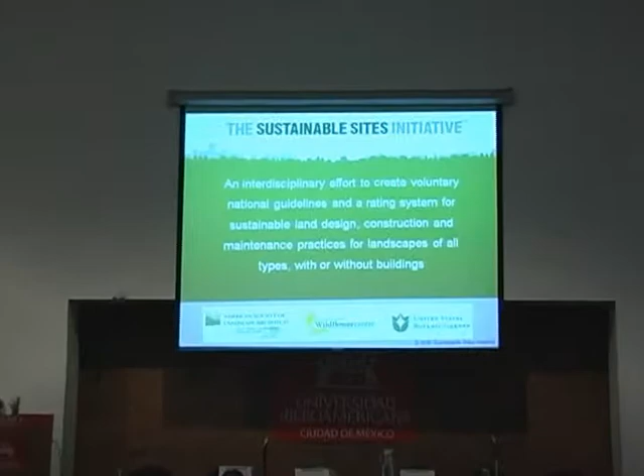There's another new program you may not have heard of because it's still in the formation stages. It's a program of, right now, the U.S. Green Building Council with the landscape architects of the United States, as well as the botanical gardens in the United States. So those entities, along with the National Wildflower Center, have decided to address site issues that aren't covered in LEED, because there are many concepts in development that are missing in LEED, and so they're trying to fill in some of those concepts with site development. Say you have a large tract of land that you are trying to do restorative design on.

There's much in LEED that's missing that this new initiative would help with. They're looking for pilot projects right now. So if you have a project that has more of a park-like concept, or if you're developing a park, this might be a system to look at.

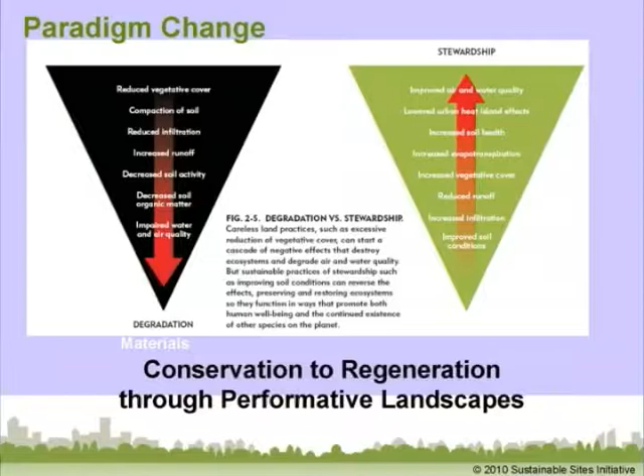They're trying to do a regenerative design. I know some of you have been in the diploma course long enough to know what regenerative design is. That was one of the first lectures you had, about how to restore a site or make it more vital than the typical way we build, which continually degrades the natural environment because of our imposing ourselves on that property.

So they have a better assessment of the site, first of all, to do a full environmental impact. What is the geology of the site? What are the birds on the site? What are the plants on the site? What is the annual rainfall? So it's more of an assessment of the site than one would typically do in just building a building.

So you're trying to get an idea of what is on the property, first of all, doing a more thorough examination of water and what flooding might be, and what natural rainfall there might be, and what water use is going to be needed within the project.

It's been a year since I've been here to Santa Fe, and I think there might be about 10 new buildings within the last year. I was asking somebody, well, what about the water? I thought that Mexico City had an issue with water. And they said, oh yes, these buildings are building these big tanks, and they have to have a truck come fill up the tank every night. So there's been a little bit of a disconnect about how much water is being used in a building and how much water is available by nature here.

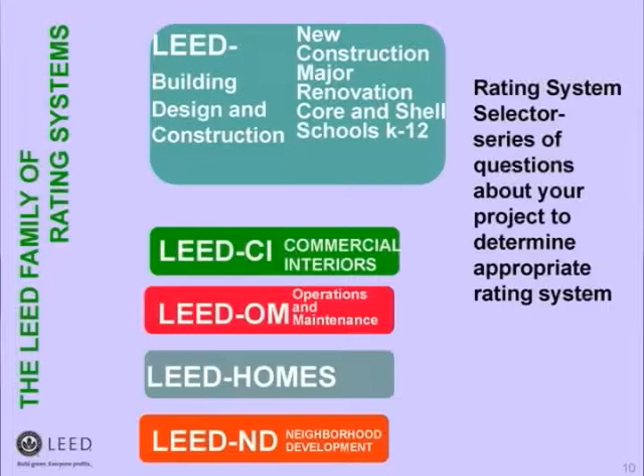The primary rating system was for new construction of office buildings, but we're trying to expand that to a number of different kinds of buildings, and to apply these to schools and distribution centers and factories and all kinds of other types of buildings—not all of them. Higher education is another effort; we're trying to do some translation of the office building concept into these other building types.

We also hope that people would continue to renovate old buildings or revitalize maybe just a couple of floors within the building. So we have a commercial interiors design effort with its own rating system.

Retail has its own rating system. Operations and maintenance—we're hoping that people will want to maintain their buildings in a more sustainable manner, which means a lot of analysis of what's working and what might not be working, and to make it work better. So we have this operation and maintenance system.

We now have a single-family homes system. Multi-family homes can apply under the single-family homes system if it's up to four stories. If it's more stories than four, then it would need to go under the new construction concept and under a multi-family system.

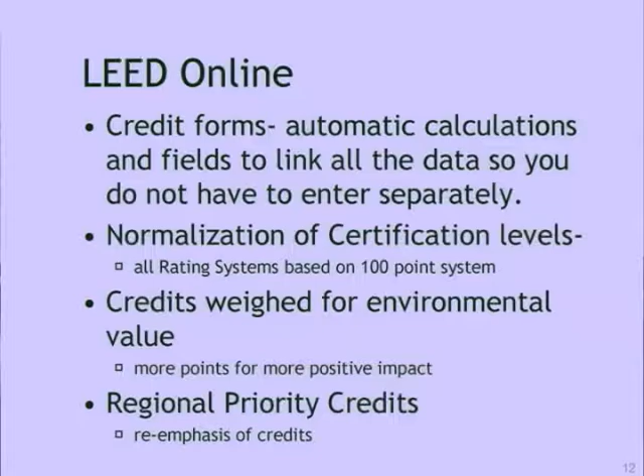All of LEED now works with LEED Online, so to get your building certified and to learn more about LEED, there is a website, the gbci.org website, that has the LEED rating system explanations on there.

To be a practitioner, you really have to purchase—I think somebody has a reference guide here—you really need to have the reference guide to get the full explanation. Actually, it's frankly not a full explanation; some of it still leaves a little bit to the imagination, and you have to go to other sources to find out what they really mean. But it's a good stab at trying to explain each one of the concepts and what we're trying to achieve, and what you would need to document to prove that you've achieved each one of these things.

So each credit within LEED has its own form online that you have to fill out, and that form guides you to the other documentation you might need. So you might need to upload a floor plan or a site plan to demonstrate that you've achieved the credit.

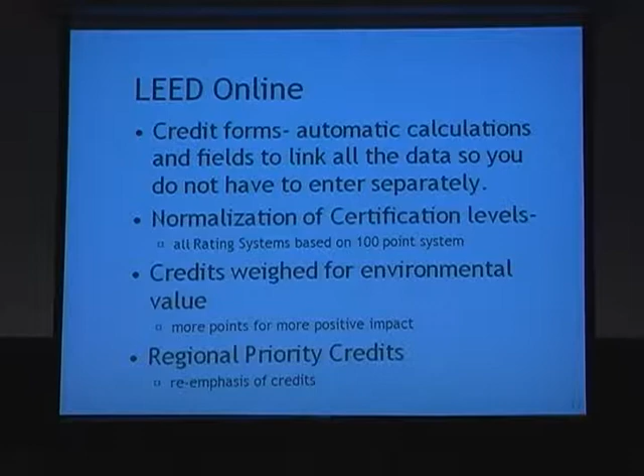We went through a reevaluation system, and with LEED it will always be upgraded. It will always be a dynamic system. We are trying to improve it continually, and we want feedback from people working in LEED to make it better. Each time we make it better, there are little incremental steps towards improvement.

The last time we reweighed the different credits for environmental contribution, so for instance, now for being on a metro or mass transportation line, you get 6 points. It used to be just 1, but we feel that's much more important to the environment now, so we gave it more points. The other new thing within this new LEED system is regional credits.

Regional credits are something that you as a chapter would identify within the LEED rating system as important to your community. So things like waste management, garbage, might be important, or I don't know what the main issues are here. Water might be important in Mexico City, as it is where I'm from in Texas. I'm from someplace that hasn't had rain since September, so water is very much on my mind. There are going to be these regional credits that as a chapter you identify as important in your community, and you get extra points for achieving those.

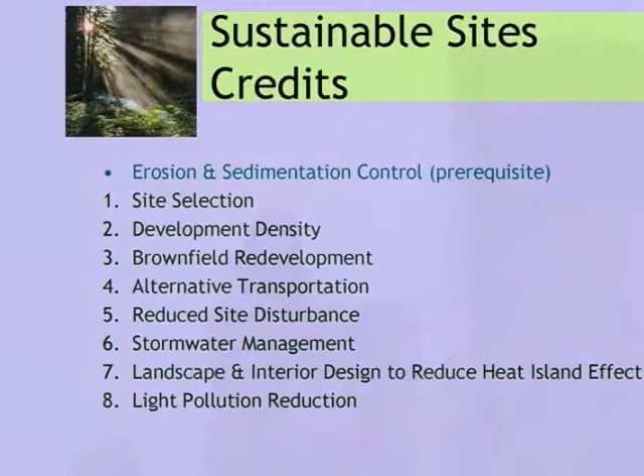With sustainable sites, it's a requirement that you control the pollution from your building during construction, so that while building you don't pollute the streams or the air. Where I'm from, we don't have much soil, we have a lot of rock, and they use big rock saws to cut into the stone, which creates a tremendous amount of dust. Everything within miles of a construction site turns white from all the dust.

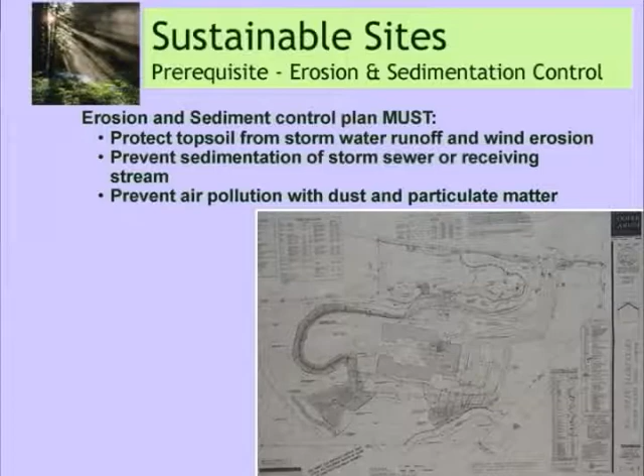We now have laws about containing that dust and keeping it on your own site during construction. There are also other laws about runoff, so whenever it rains, you can't have construction pollution or silt run into the stream. That's a requirement for all LEED projects everywhere. You need to identify where the streams are in your area and make sure you're containing any water from running into a stream, and prevent dust and particulate matter from becoming airborne. Here are some examples of erosion control and pollution prevention, some of which you might not recognize.

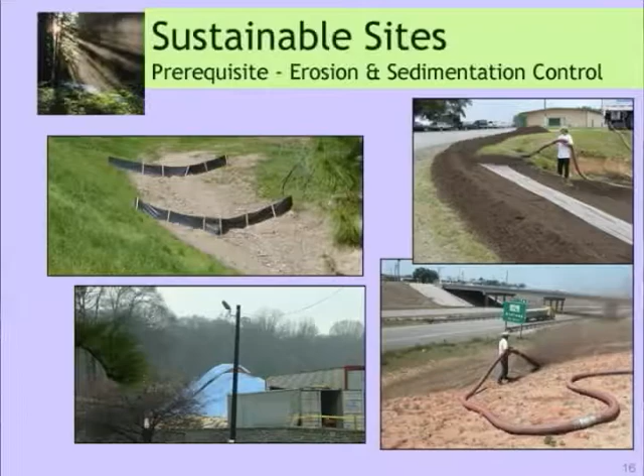And then you might already be familiar with siltation fences and seeding. They're seeding the site so that grass grows really fast before it has a chance to cause erosion.

This is the only point where you don't do anything and you get the point. This is one where you're trying to avoid a lot of situations. So you're trying to not build a building on a former farm. You're trying to avoid being in a floodplain.

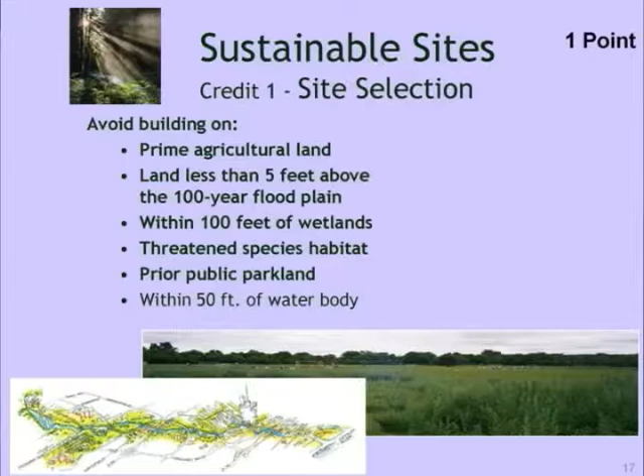I know that's a difficult thing for Mexico City. I mean, isn't your whole city a floodplain?

I think it is. Anyway, you're trying to avoid wetlands because wetlands are a very crucial environmental natural balance system. It helps with floods, it helps with habitat, all kinds of things. So we consider wetlands very precious. When I was growing up, we used to call them swamps, but we don't use that term anymore. We call them wetlands, and we value them now.

We used to, in the United States, have this organization called the Army Corps of Engineers, and I think they felt it was their mission to fill in every wetland possible. So they were really trying to fill in dirt everywhere there was any kind of wet area.

We want to avoid any sort of endangered species habitat, including birds, plants, and insects. And we also want to avoid any kind of public park land. We don't want to redevelop on a public park. And we don't want to develop within 50 feet of a water body.

Can anyone tell me why that is? Why don't we want to build really close to the ocean, let's say? Well, there's flooding, there's hurricanes, there's natural disasters that happen when you're really close to water bodies. It's just kind of not very smart to build very close to those things because you know your building's going to be harmed in the future, or your building might harm the river or stream or body of water that it's next to.

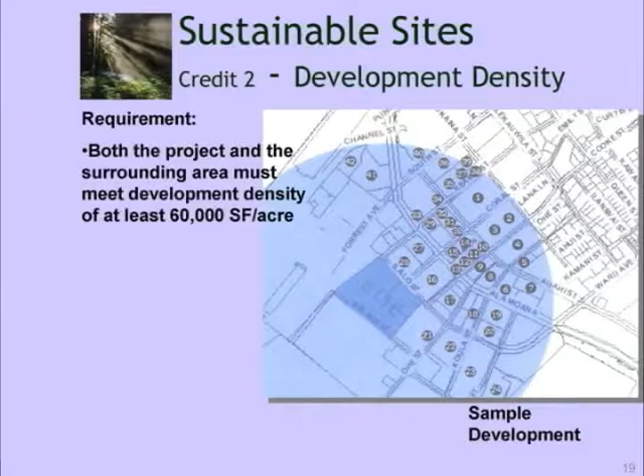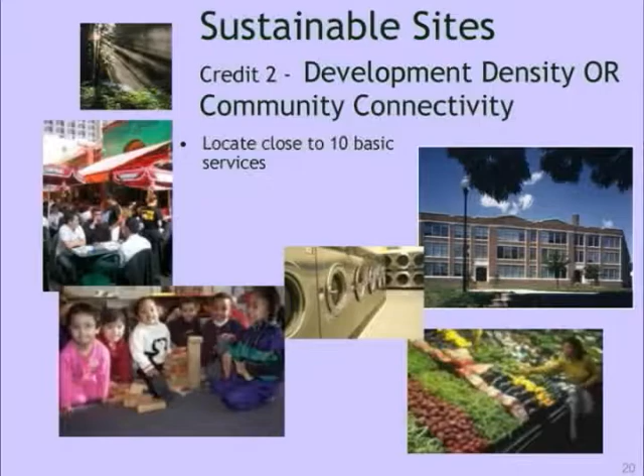So there's two different strategies for this credit. Either redevelop in some place where there is already a dense urban core, and to achieve this credit you have to identify what the density is around your site. Or, because that was difficult and challenging for some of the smaller towns to get that same level of density, and we still wanted small towns to stay that way, stay as a small town and not keep trying to make themselves urban...

We said, well, we can identify some crucial community connectivity areas like schools, grocery stores, restaurants, places where people do their normal business. So if those are within walking distance of your building, then you can get this LEED credit.

We also wanted to give credit to develop a brownfield site. Can anyone give me an example of what that is?

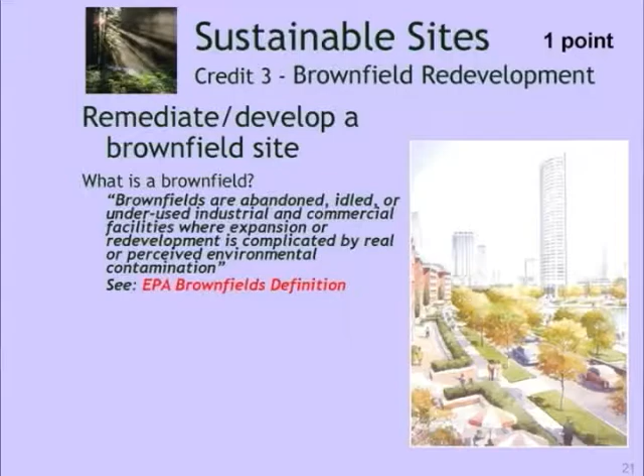Actually, I just learned this university here is on a brownfield site, which was a surprise to me. I didn't know this used to be a landfill, a garbage dump, and they built the university on top of that. That's an example of a brownfield. A factory is another example - if it has polluted someplace and there's something to clean up, and you make it clean enough for a building and for humans to be there safely, then you get credit with LEED to make a site more revitalized, remediating the brownfield.

There are 4 different credits that have to do with alternative transportation - alternative to the car, the single occupancy vehicle. In the United States, I think we only spend 55 cents per person on pedestrian infrastructure. I think here in Santa Fe you spend less than that - I did try to walk around here once, and it's really hard to walk around in this town. We spend $72 per person for roads. There's a disconnect here in the United States, and I think you have a similar one here in Mexico City, in that we're not putting enough emphasis into letting people walk or bike around conveniently.

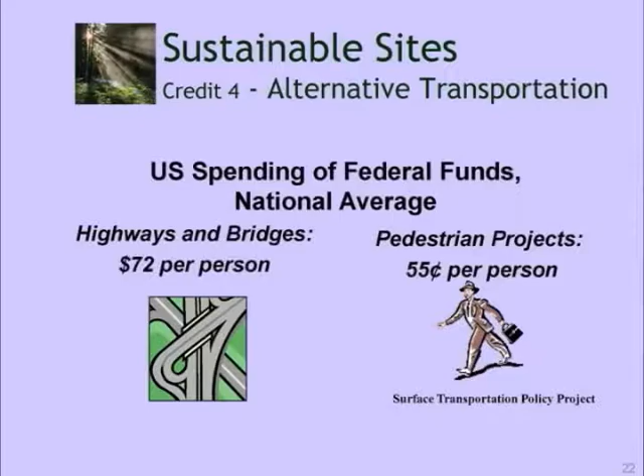To have safe pedestrian access to places - where I'm from in Texas, it's really hot, and everyone keeps saying no one in their right mind would walk or bike. But we used to have a building downtown with no provision for bike racks, no shower or anything like that, and nobody rode their bike. Our same group of people moved into a building where there were bike racks and showers, and about 25% of the people started riding their bikes to work. This is the same work group who for 10 years never rode a bike, but as soon as we made it accommodating for alternative transportation, people tried to do it.

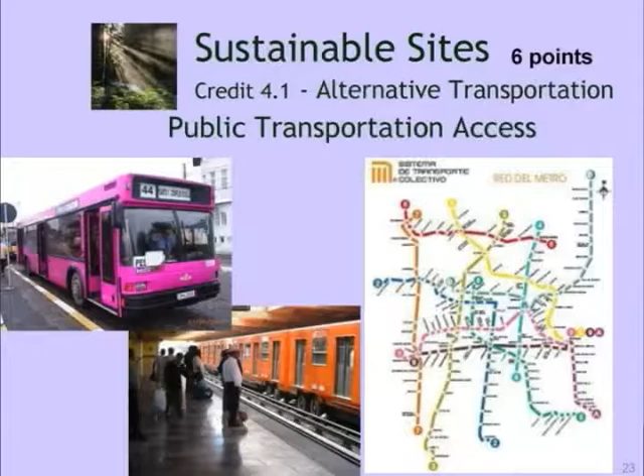This is the credit where I was saying that you have a lot of points for. So if you develop your new building along a route that's already on your metro or on a major bus route, so you have more than just one bus a day - when you have many buses a day coming by your building or within a quick walking distance, you get 6 points for this. That's a pretty good deal. This is not something that's going to cost your project in construction cost - it's just a natural attribute a wise owner would have looked into for redevelopment of a building.

You know, I'm not good at converting. It's half a mile - what's half a mile? So it's not real close, but, you know, a comfortable walk.

Another form of alternative transportation is bicycle riding. I understand you've been trying to build more bike lanes within Mexico City, some more successful than others. For this credit, you would need to also have a shower in your place of work, or access within an easy distance for someone to take a shower, because a lot of us get really sweaty when we ride bikes, no matter what time of year it is - so you can be fresh for work. The other requirement is safe storage for bikes so they don't get stolen, and the second requirement is to have showers. LEED doesn't care about male and female - it can be a unisex shower. It just has to be one shower per number of people. It's pretty simple to do.

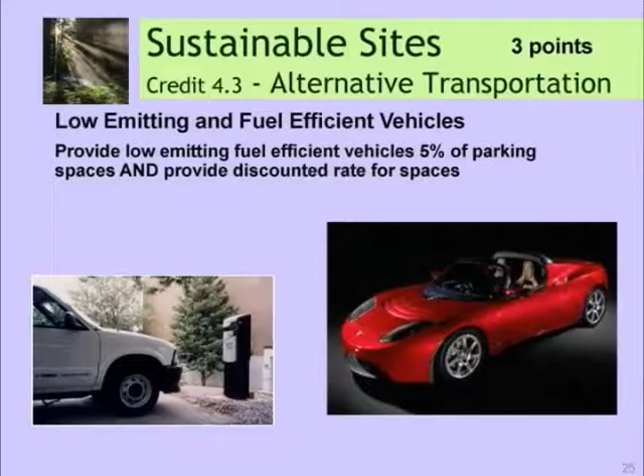I think when we were starting LEED, we were expecting all the cars by now to be run on electricity or something like that - there's a strong favor for having plug-in cars for this next credit. We realized after about the first year that wasn't going to happen anytime soon, so we changed this credit to be low emitting and fuel efficient automobiles. This is preferred parking, or even providing fuel efficient automobiles for your project. So if you were to provide parking spaces at all, the requirement to get this point is that you put those preferred parking spaces really close to the door so people can feel good about driving to work in their low emitting fuel efficient car.

I got to drive one of those new Volts - have you all heard of that? The Chevrolet Volt the other day, and I was really surprised. I was expecting it to not have any pickup. I understand this Tesla has a lot of pickup, but I don't think they're very available yet. This Volt is available, and I was surprised at how safe it felt and how much power it had and the range it has.

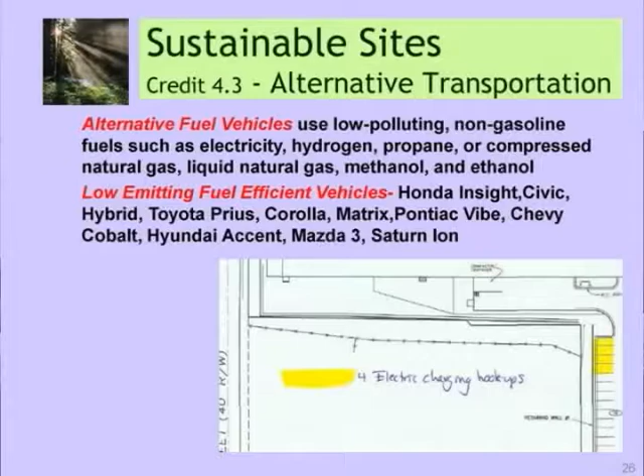So you will have to demonstrate that you have preferred parking places for these vehicles, or that you provide the vehicles for your staff, one or the other.

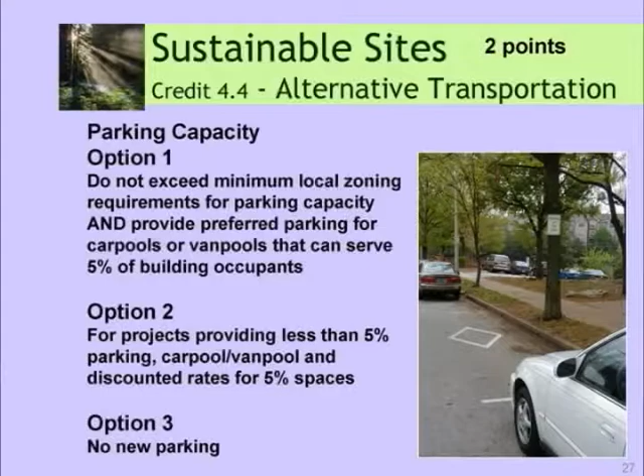Another alternative transportation strategy is to try to make it very costly for your employees or people in your business to drive their car. So it says to either have no new parking for your building, or to not exceed any of your local building codes. Do you even have a building code for a parking requirement? You do, so you do have to provide some parking if you have a building. This means don't exceed that, because a lot of businesses will say, oh, we need to prepare for Christmas time when we're going to have this huge party and everybody wants to bring their own car here, so they build the biggest parking lot possible. This is build the smallest parking lot possible, and for you to function within your business and to meet the building code.

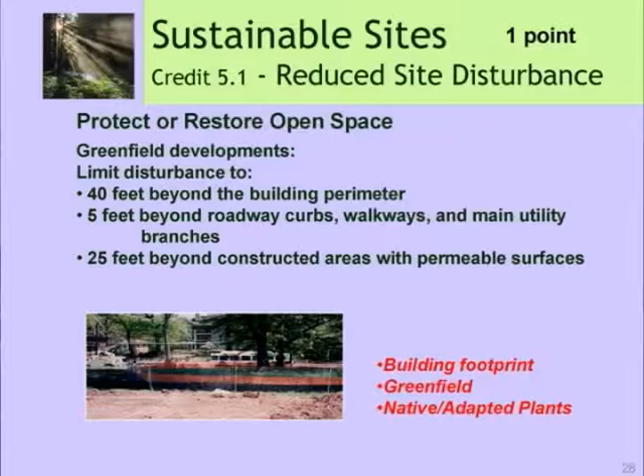Another good thing to do is to reduce the disturbance during construction. A lot of times, at least in the United States, and I think it's pretty typical all over the world, you get a big bulldozer and just bulldoze the heck out of the site, make it really flat, so it's easy to build a building on. That really destroys all of the natural habitat. It destroys the visual qualities of the site. It destroys the ability for the site to help remediate stormwater, because often plants can clean the water and slow water down during a storm situation.

And it also prevents the trees from cooling the site, so it has multiple benefits to keep what plants are on your site there. And if there aren't any plants, then to bring them to the site. So right now, for this credit, we're trying to protect what plants are there and to not do any more harm to the site than you need to build your building.

One of my first projects that attempted this, long before LEED, we tried to make sure that this site, which was going to be for a nature center, was protected, since the nature center wanted to protect the nature, right? So they didn't want bulldozers everywhere ruining it. So what we did was we put signs on the trees with the value of a replacement cost for each tree. We had these trees tagged with like $23,000 or $30,000, because that's what it would cost to buy that size tree and bring it to the site. We did the same thing for the other vegetation. And then all the workers on the site had to sign a contract saying if they damaged any of those tagged plants, they had to pay for it.

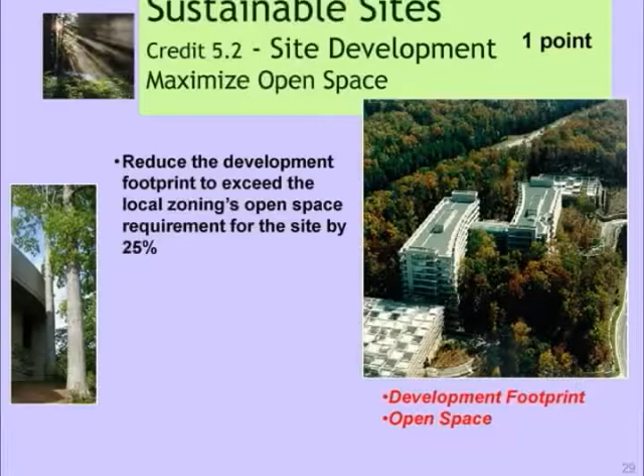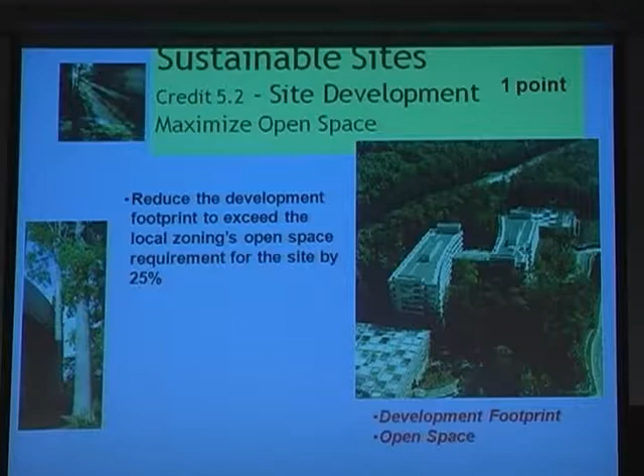For this maximize open space credit, we are trying to make sure that there is such a thing as habitat. In this particular case, we're trying to reduce the footprint. Texas might be the capital of this, where we want to build a one-story building that takes up acres and acres and acres instead of building up. I mean, we just seem to want to do that. So this is trying to get away from that concept, build a smaller footprint and build up.

This big building on the right is UPS's national headquarters. They decided they didn't want to harm any trees during construction. When they mapped out the footprint of the building, they dug up and relocated any trees that were in the way. They felt this was important for creating a pleasant work environment, wanting executives to look out into the woods and see these beautiful trees. They even use that as a recruiting tool. So preserving the trees was really important to them in this case.

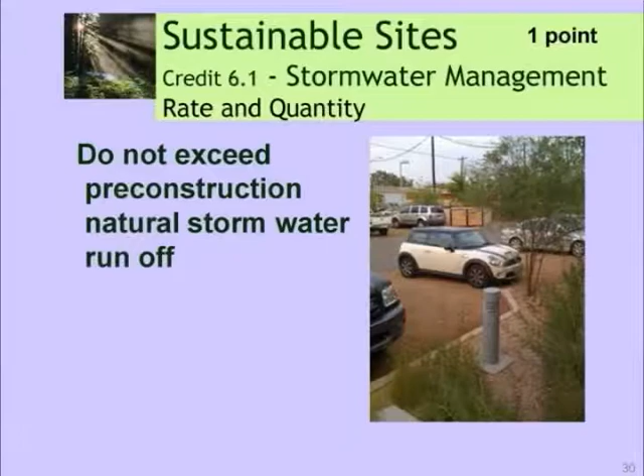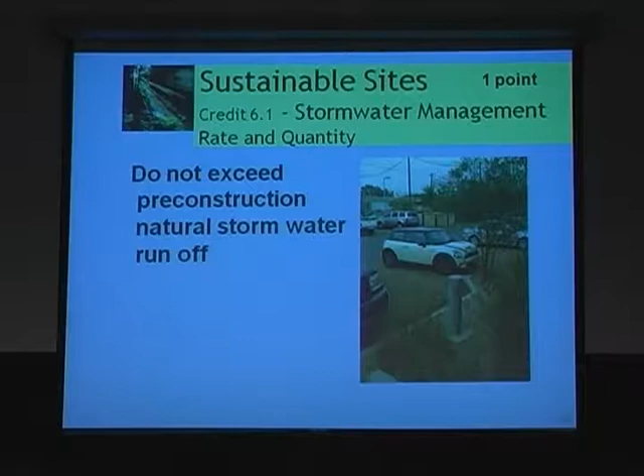I was working with the country of South Korea, which actually gets quite a lot of rainfall. I was helping them develop green building standards for a new building that was going to be their first ever green building in South Korea. It rained the entire time I was there. Coming from a place where rain is precious but also causes flooding when it all comes at once, I started asking what they were going to do about flooding.

I was looking at the parking lot during one of these rain events, and we had to walk through a lot of water just to cross it. They said, oh, it's not a problem here. I said, it's a problem for me to walk through this much water—surely when this building is finished, it's going to be a problem for these people too.

I understood that before construction, they actually raised the building up and added amenities to capture storm water, because a really bad storm hit the week after I left and the area flooded so badly that they thought, 'Sue might have been right about stormwater. We need to go back and do something about stormwater management for this project.' So they did, and it worked.

There are two different LEED credits regarding stormwater. Even if you think you don't have stormwater problems, you probably do. There's the amount of water falling on your site, and LEED wants you to survey the site before you build to find out how much water runs off—and once you build, you shouldn't let any more water than that initial amount run off.

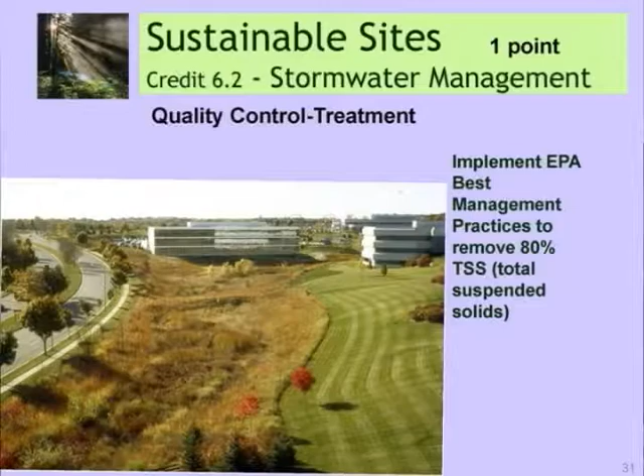The other thing to be mindful of during storms is that water from your parking lot—most people's parking lots have a lot of oil and hydrocarbons on them from cars—can run off your site easily and quickly into a stream.

This piece of property, I think in Detroit, Michigan, was being fined by the federal government for creating pollution problems, with a lot of runoff going into the stream. A landscape architect said, if you give me the budget you were planning to spend on mowing and landscape maintenance, I bet I can not only save you money on maintenance but also save you those pollution fines.

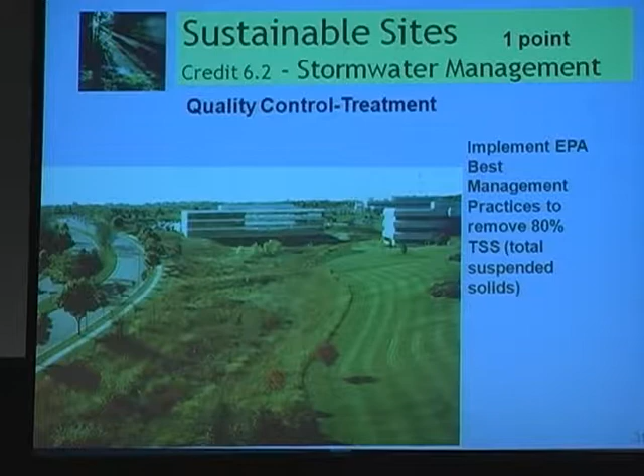So he went back in and vegetated this former ditch or culvert with native plants known to take up hydrocarbons. They take the pollution out of the water and clean it up before it goes further downstream. It's now a visual amenity as well, reducing maintenance since there's no more big mowing, and they're no longer paying fines for pollution.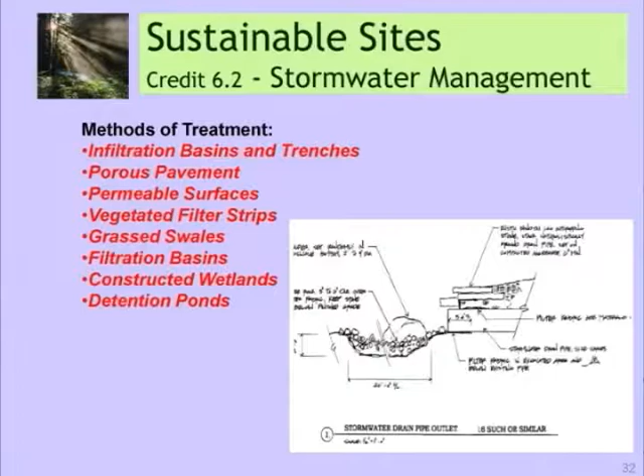There are other best management practices, like rain gardens. One of the best things is to also collect rainwater so that you don't have stormwater runoff—you're collecting it already to use within your building. There are a number of different ways to use nature to your benefit to prevent stormwater problems.

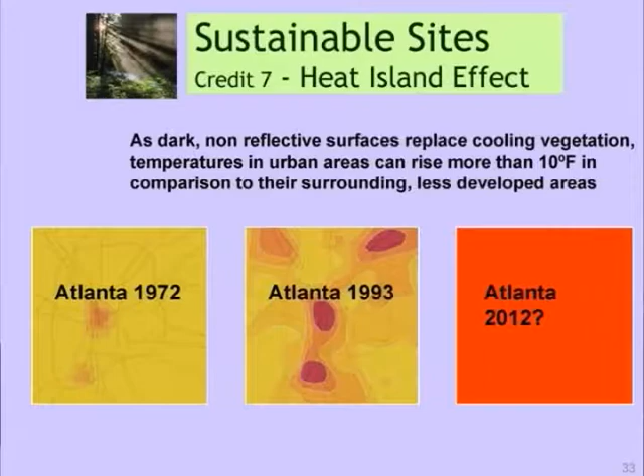We have this organization, called NASA in the United States, our aerospace engineering organization within the government. One thing I think is really neat is they do these weather studies with all these weather satellites they've put up in space. They've done studies with different cities about the heat island effect, measuring temperature all over the world since NASA started in the 1960s. I'm sure they have data for Mexico City and your temperatures here too.

So Atlanta decided to take advantage of these studies to help with their planning, and they started in 1972 getting NASA data on the heat island effect, or the temperatures of Atlanta. You can see in 1972 the downtown area, mostly paved with buildings, was pretty hot—about 10 degrees hotter than the rest of the area around it.

By 1993, other areas had started heating up too. The one in the south is a big airport, so they paved for the airport, which got really hot, and also built a lot of buildings around there. The area at the top is a new town—basically suburbia being built outside of downtown Atlanta. So the problem is it's all growing into one big heat island effect.

They used to have a whole lot of trees in Atlanta, and this is just an example of the urban forest disappearing because of urban building. So they're now doing a very strong reforestation effort downtown to try to cool the city down.

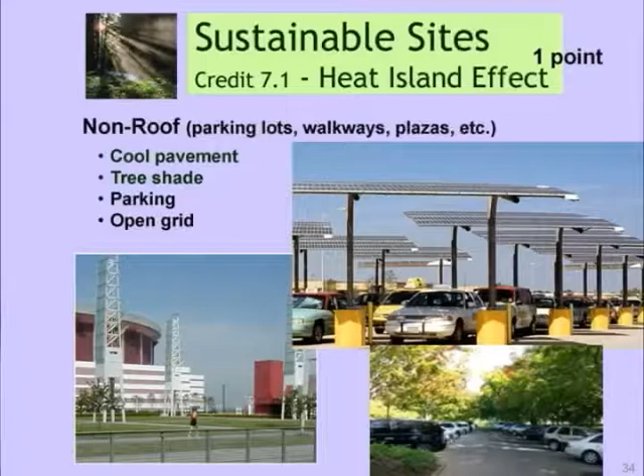The heat island effect is something that's affecting our global climate. It really is causing climate disruption, among other things, but just having much higher temperatures causes different weather patterns. Before, much of the world could be comfortable without mechanical heating and cooling, but we're having a lot more difficulty with that now because we're heating up our urban areas.

One of these is my project—the taxi waiting area outside the Austin airport. We covered it with photovoltaics to shade the taxi waiting area while people wait. I think we should have done it a little more uniformly for more coverage. I don't think we succeeded too well, but anyway, it's one way to generate electricity—all that electricity runs the parking lot lighting for the airport.

Cool pavement is another way to try to keep your site cool. This picture here on the left is the stadium in Houston—that green area is the parking lot, using a product called Grass Pave. It's enough support to drive a fire truck through, but it's grass most of the time when there's no event at the stadium, so it's much cooler. Houston's a hot place.

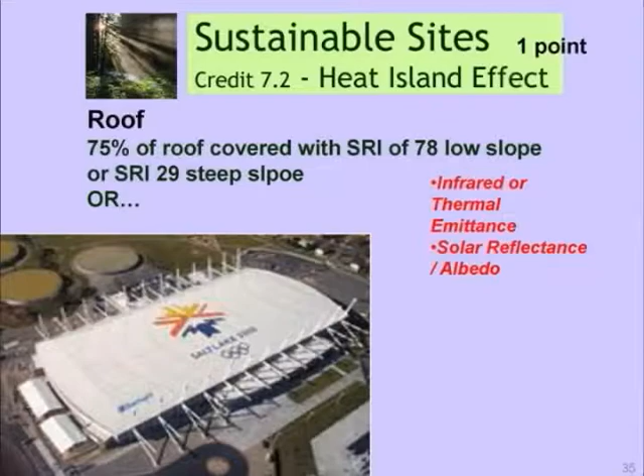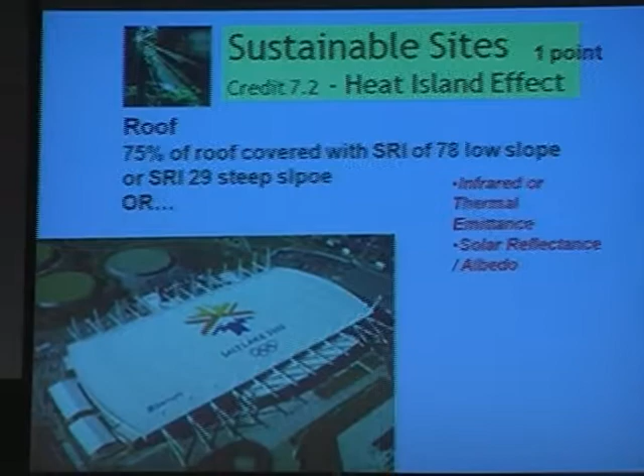It used to be very common to have black roofs, using tar to keep the roof waterproof. I'm pleased the cost of tar and oil is going up, making it look better and better to have a membrane roof and cooler roofs. A cool roof versus a black roof can make a 35-degree difference in your building. If you keep the sun off the building, even in a cold climate like Chicago, they found they were having to air condition much of the time because temperatures were rising and things were getting uncomfortable. A white roof made sense in Chicago, even with cold days, because they have a lot of heat days too. So a white membrane roof is something that will help you get LEED credit.

There's another concept called a green roof, where you vegetate the roof too. It might be a really good thing for here in Mexico City to have a vegetated roof. It might not be a good idea in other parts of your country where you don't get so much rain, because you might have to supplement irrigation on your roof. So just be mindful of what's appropriate for your rainfall, weather conditions, and situation in your place.

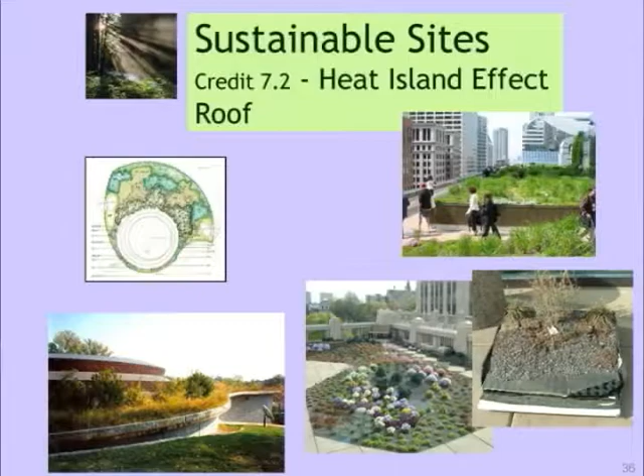These are some examples of vegetated roofs. They can be a real visual amenity. It's much nicer to look down on this from a building next door than to look on a black tar roof.

This is an area that's near and dear to my heart too: light pollution reduction. Living in Texas is somewhat similar to living in Mexico. We share a lot of similarities in migratory birds and migratory insects. We're on this big funnel that goes from Canada down to South America, and they go back and forth. They migrate by a bunch of different means, and the sun and the moon are some of the contributing factors to navigation.

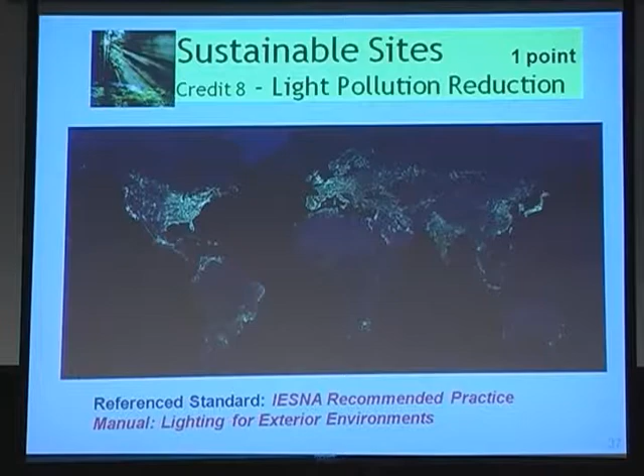When you have a lot of light at night, it confuses them. It's also an irritation to your next door neighbor to have really bright lights, so that's why we call it light pollution. As you can tell from this slide, you can actually see Mexico City. And who gets to benefit from all that light? The astronauts.

And somebody's paying for all that electricity to benefit the view for the astronauts. I just don't get it. So the point of this credit is to reduce light pollution and to also decrease the amount of electricity we're spending to go up into outer space. Try to put light where you need it for safety purposes, and don't have vanity lighting like Las Vegas or all these places that want to light up the sky, because we're really polluting, we're affecting so much of the environment that I don't think we understand yet.

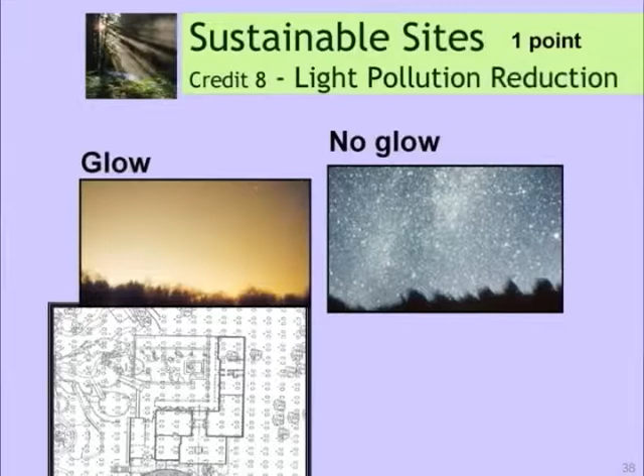This one friend of mine lives in Los Angeles, and she has 2 sons, and they went camping one time in the desert, and she realized her sons were 7 years old and they'd never seen the night sky. They didn't know what all these stars were, that there were such a thing as all these stars in the sky. That's really a sad thing when you don't know about that.

Anyway, there are different numbers of ways to put light where you need it for safety purposes, to shield the lighting so it doesn't go up into the sky and cause glare for people.

There are 26 possible credits for the sustainable sites category.

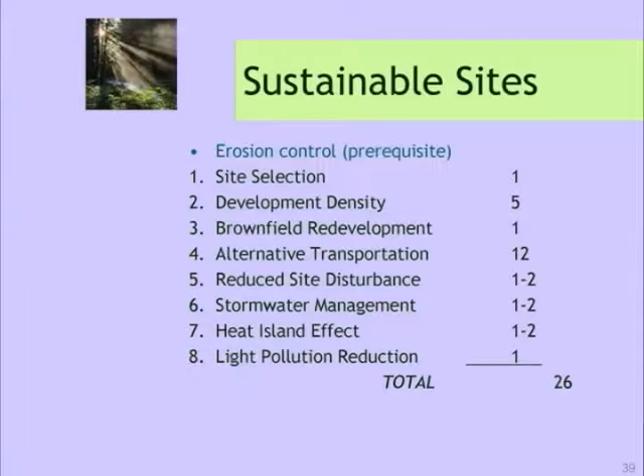The next category is water efficiency, and as you can tell, this is one of my main passions at the moment: making water go farther. We're really depleting our groundwater sources at an alarming rate throughout the world.

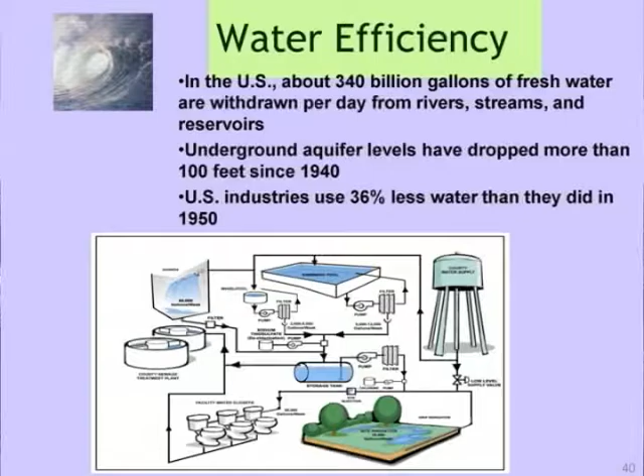It used to be that people kept thinking, well, the water's in an aquifer, it's in the ground, it's going to come back into the ground every time it rains. But that's not true, it doesn't happen like that. We're causing so much pavement to cause the water to run off before it sinks into the ground. So we're not recharging our aquifers, and we're also wasting a lot of water.

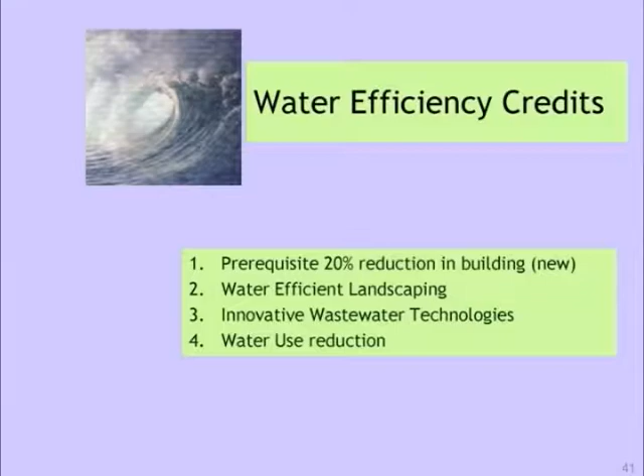In the United States, we've tried for a number of years to get plumbers and manufacturers of toilets and water fixtures to be more efficient, and nothing was working. Our Department of Energy realized that 30% of our electricity was going towards pumping water. That's a lot of electricity for moving water from one place to the next.

And it's a real problem when you have a toilet that uses 15 gallons of water to flush, or that you use treated water that's gone through all kinds of electrical-using and chemical-using systems to clean it up enough for drinking water, and then we use it to flush.

There are some cities in the United States that now have dual pipe requirements, where there's a separate water system for sewage and a separate water system for drinking water, and that's helped people realize the value of drinking water.

Anyway, in the United States, it's a weird standard that we have for water. It's called the Energy Policy Act of 1992, because of the amount of electricity used to pump water, not because water's so precious. I think at the time they thought that energy was more precious. I figure whatever it takes.

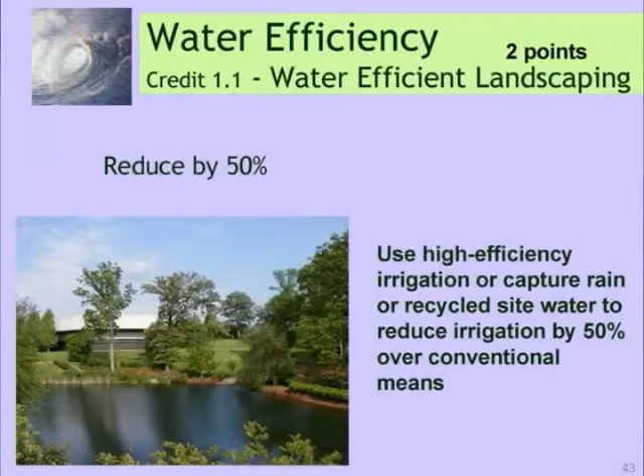There are two categories for water efficient landscaping. My favorite is don't use any water for water efficient landscaping, don't use any potable water. Try to use native plants that can manage on natural rainfall. That shouldn't be difficult for you at all here in Mexico City. You've got such generous amount of rain here.

So collect rainwater. Here you'd probably need to do some filtration to get rid of the acid rain and that kind of stuff, but it's quite doable. It's quite doable to use rainwater for drinking water, but you can also use rainwater for irrigation. In this LEED case, we're still promoting using water for landscape. I really think we should have more points for not using water for landscape.

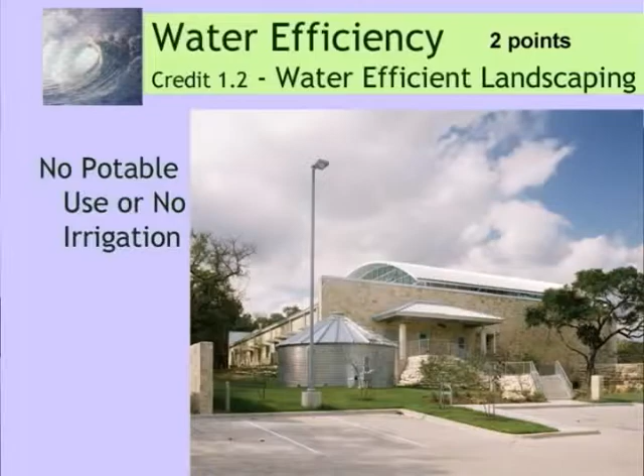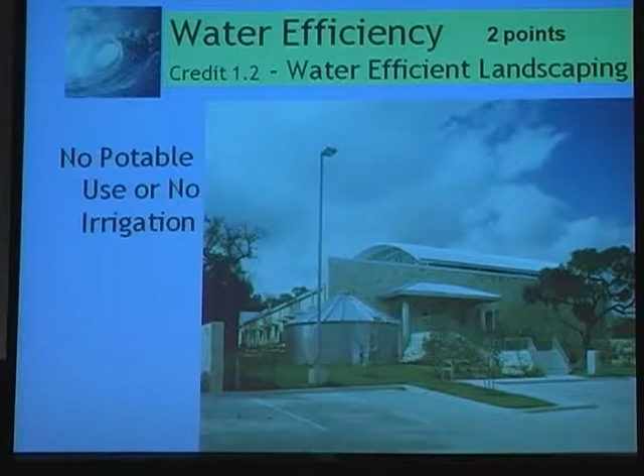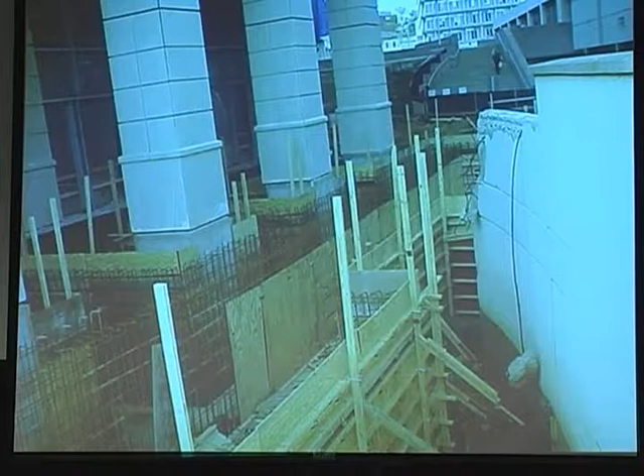So cisterns are what one would need, to collect the rainwater and storm water, or even to clean up gray water. This is an example of a large building in Houston putting in a cistern. They're going to use this water, because Houston gets a lot of rain, for flushing toilets in the building. This is kind of new territory for the United States, particularly for Texas.

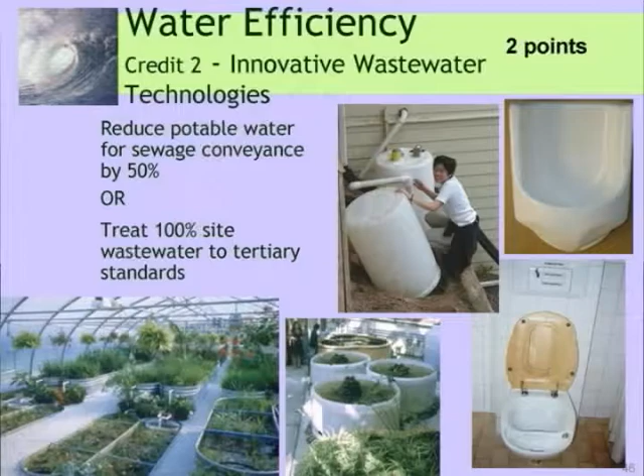If you want to go a few steps further, LEED would encourage you to treat your wastewater on site. This goes back to the point of pumping sewage all over the place. In Austin, we pump sewage huge distances to sewage treatment plants, which is just ridiculous, and that uses a tremendous amount of fresh water to do that. So with LEED we're trying to decentralize some of the wastewater plants and treat your water on your site, clean your own sewage up on site.

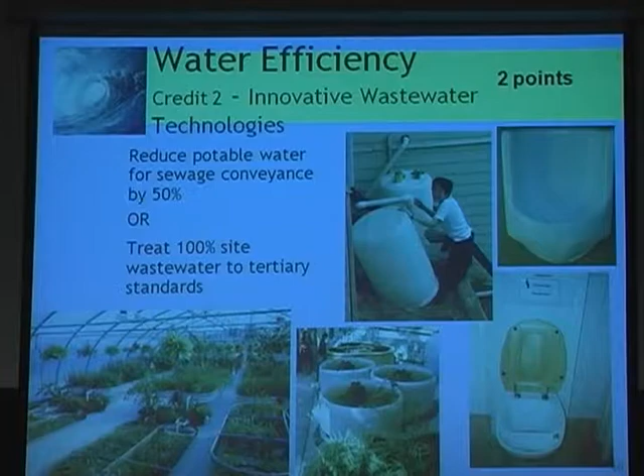There's an example here of a living machine on the left. This is a system of plants, fish, and aeration to clean sewage up to clean water standards. At the end of it, it can be reused over and over again. There are other kinds of filtration systems that could do the same thing on site. So we encourage you to look into that instead of using fresh water to flush your toilets, and we would like you to treat your waste on site.

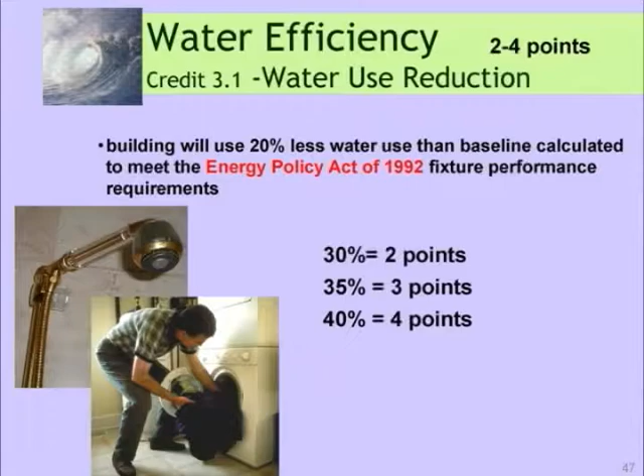We also would like you to just generally use water more efficiently. I'm staying in a hotel right now where when you push the button on the toilet, it just whooshes this tremendous amount of water down the toilet. You just wait there for quite a while as it's flushing. I don't know how many gallons it uses. It's just ridiculous. So we're trying to get people to be more mindful of toilet flushing, the amount of water for toilets, and the amount of water for hand washing, washing clothes, everything.

So there's a baseline standard now within LEED that you have to be 20% better than the law with regard to the different fixtures, and anything over that will get you some points.

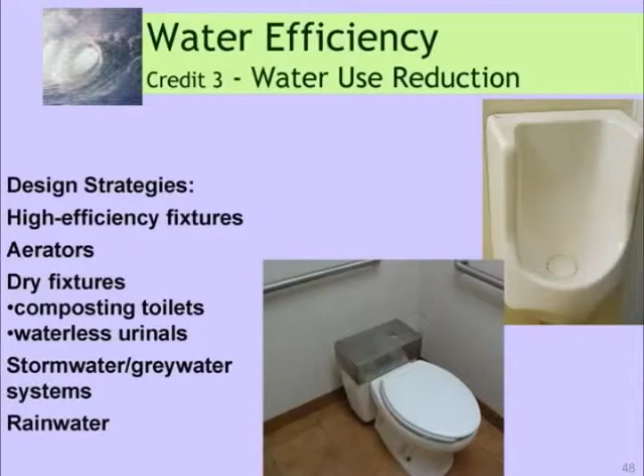This toilet here at the bottom is at a McDonald's. It's actually a composting toilet, so it doesn't go into sewage, it goes into a compost system, treating its own sewage on site. McDonald's is starting to recognize that a lot of people stop in to go to the bathroom instead of buying a Big Mac, so they're trying to realize how much water they use.

And there are other things that are more efficient. Unfortunately, when we started LEED, there weren't very many efficient fixtures, and now there are very efficient urinals. There are waterless urinals, but also super, super low water use urinals and low water use toilets, and aerators for faucets and timers for faucets.

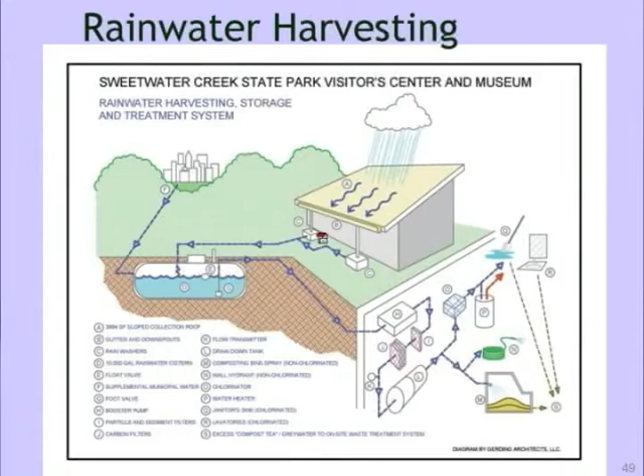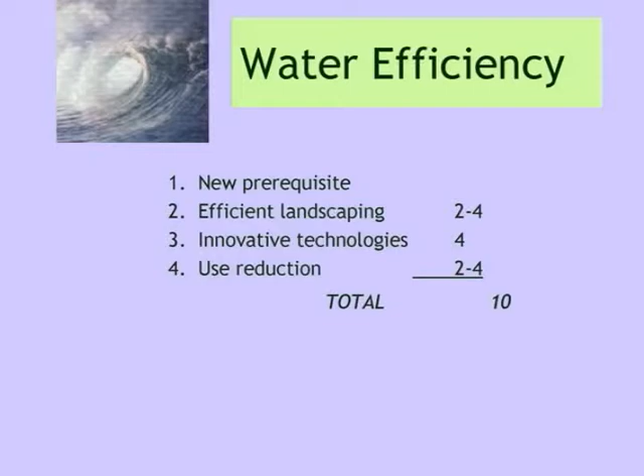Water efficiency has 10 points. In my mind, that's not enough. We need to double it, but we're working on that with LEED.